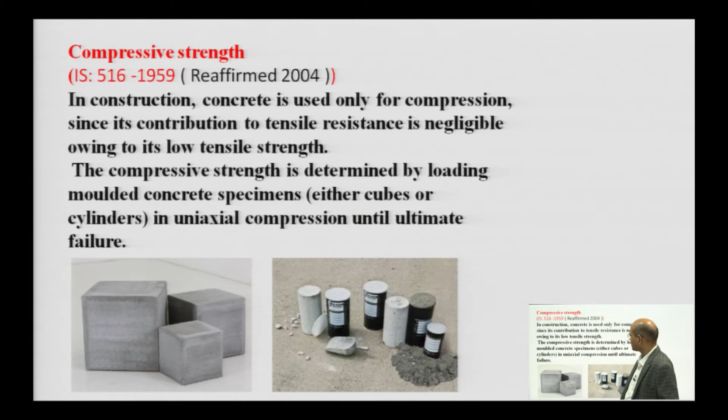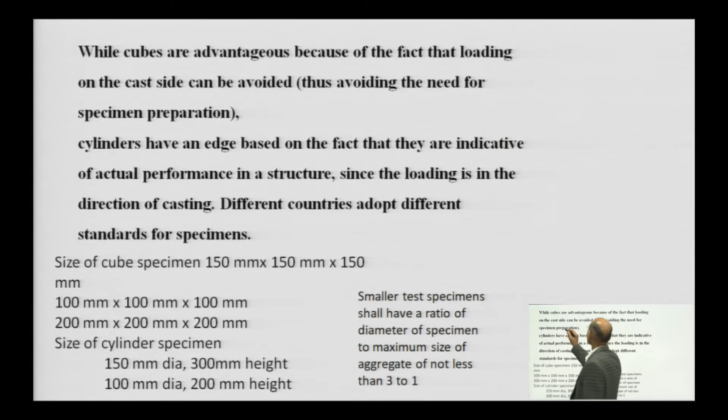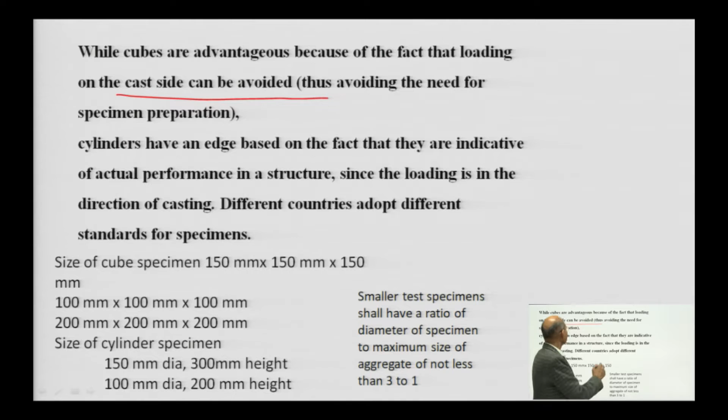Cubes are advantageous because loading on the cast side can be avoided. There are two issues: one is getting a plane surface, and the other is orientation of aggregate. Generally we have a procedure to test the cube. Suppose you have cast along this side, then we will test along this face or along the opposite face. That is the ease with which we can cast it and test it.

But suppose you want to test a cylinder. The cylinder will be cast on this edge, so you will not get a smooth surface. So capping is required, and capping involves a tedious procedure. That is why we have a customary of testing on cubes.

Some countries, like the USA, have a customary of testing on cylinders. These are the standard sizes of the cubes: 150 by 150 by 150 mm, and also 100 by 100 by 100 mm.

Suppose the maximum size of aggregate is not more than 20 mm, then we can test on 100 mm by 100 mm. Otherwise, we have to test on 150 by 150 by 150 mm size, which can handle up to 60 mm maximum size of coarse aggregate. But suppose you are using more than 60 mm, then we have to go for a larger size, like 200 by 200 by 200.

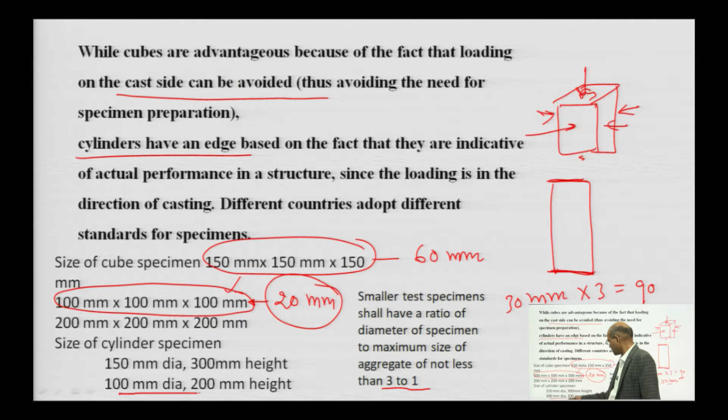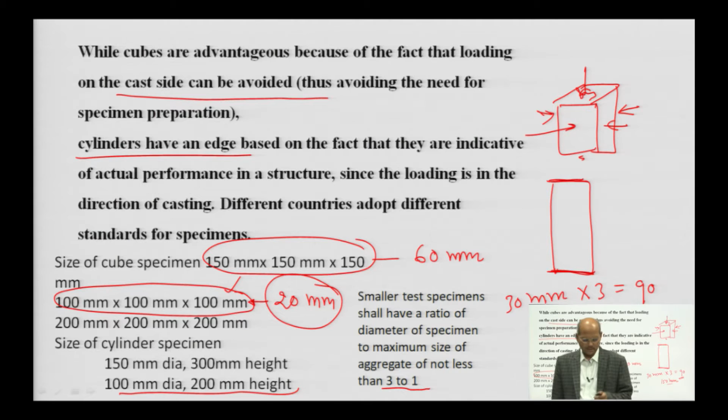About the cylinder, the standard size is 150 mm diameter and 300 mm height. If the maximum aggregate size is not more than 20 mm, you can use 100 mm diameter and 200 mm height. This is the standard size given in the IS code.

Now I will discuss the Platen effect. What is the Platen effect? Suppose we have a cube of size 150 by 150 by 150, and we are going to test it under a compression testing machine. Let us say we have a machine head here, I will take a different pen. Suppose this is our platen here.

This is made of steel, and modulus of elasticity of steel is approximately 2 into 10 to power 5 Newton per mm square. What is the modulus of elasticity of concrete?

Modulus of elasticity of concrete depends on the grade of concrete, and generally it is much lesser. Empirically, the modulus of elasticity is given by 5000 under root FCK, as given in the Indian Standard Code IS 456 2000.

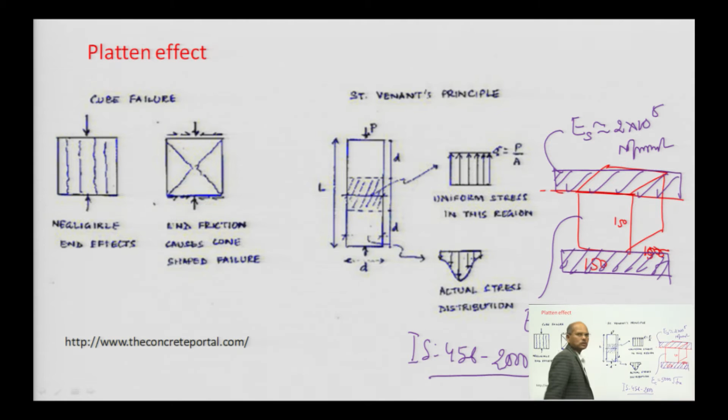Say we have a grade of concrete with characteristic compressive strength of 25. So it is 5000 under root 25, which becomes 2.5 into 10 to power 4. So almost you can say less than 10 times.

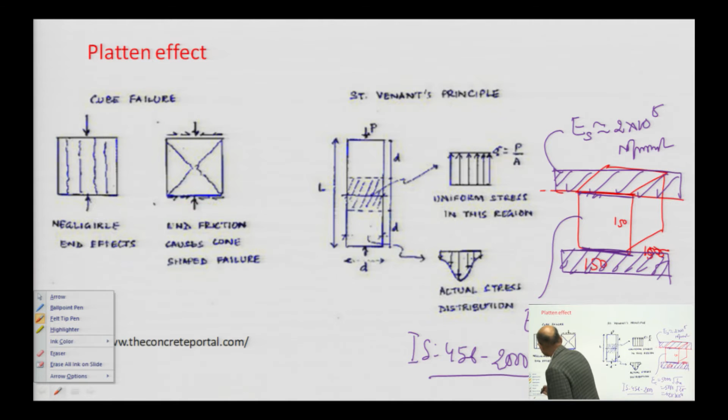So what will happen if there is friction between this surface and this surface? Due to this friction, there will be composite action.

Say this is the Young's modulus of concrete and this is the Young's modulus of steel. Concrete will try to expand, but due to the platen friction between the platen of the machine, this will not allow it to expand, so this portion will be under compressive action.

So what is going to happen? Whatever cube you have here, a standard cube, I will draw the 3-dimensional figure. This is under triaxial compression near the surface, and load is coming from the top. Due to the triaxial compression, this is having a confining effect.

Let us say we have some concrete here that is brittle in nature. Suppose we confine this concrete due to the frictional action. So this is going to take more load.

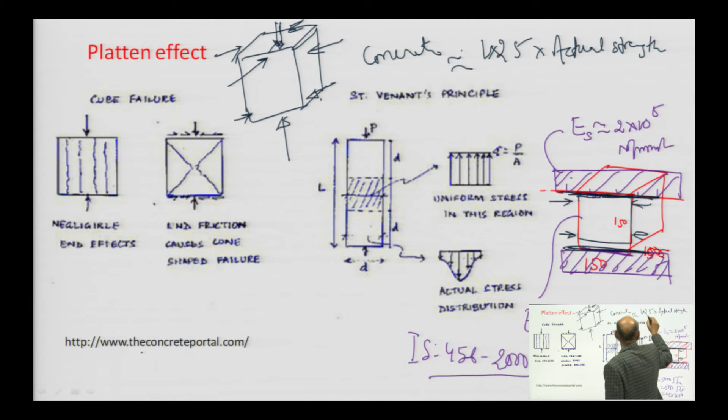Due to this platen effect, concrete is able to take at least about 1.2 times more load than its actual strength, about 1.25 times more than actual strength.

So if the platen effect is there, due to this we are getting a 45-degree angle here, and the result is we are getting more strength than the actual strength that is there.

In that case it is going to give you the actual strength, and the failure pattern will be different. In this case it will crack parallel like this, and in the other case, due to the platen effect, it is going to crack in this fashion because it is under confined condition.

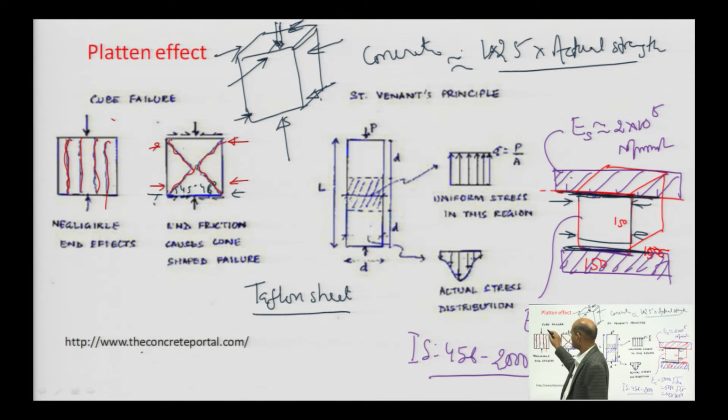So this is going to give you the actual strength of concrete. But due to ease in testing, we do this testing only, not the actual testing.

Suppose you want to test on a cylinder, generally if you want to get the compressive strength of concrete for research purposes where you want actual compressive strength. In that case, we increase the height. If diameter of the cylinder is d, height is taken at least 2 times d minimum, more is better.

So in this specimen it has been shown more. Here this is the diameter. So whatever central portion is there, that may be having actual direct compressive strength. Here you will get actual compressive strength, and you will get uniform stress throughout the central zone.

We have a uniform stress, uniform axial compressive stress we will get. We will get the actual compressive stress. So we know that according to Saint-Venant's principle.

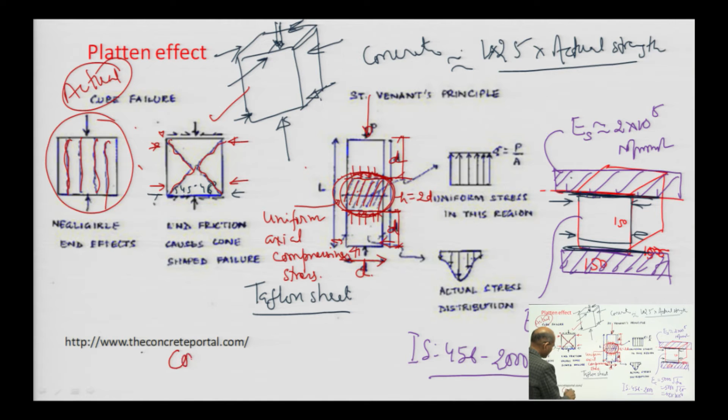So actual stress, suppose you want to get it for the cylinder. This is about the concrete cylinder strength, which is the actual one, and it is about the cube strength divided by approximately 1.25.

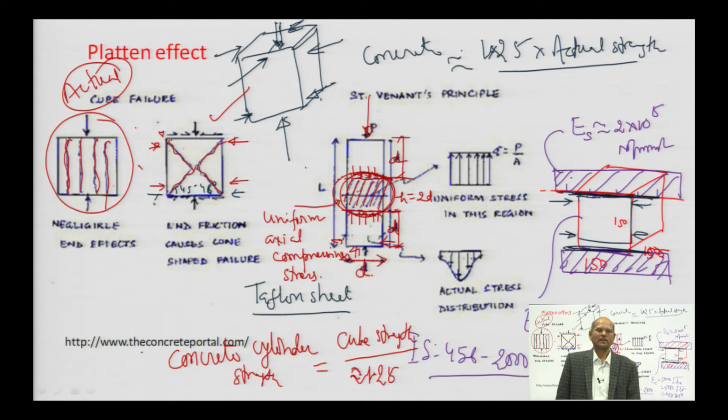You may not get exactly the same result because this material is not homogeneous in nature, it is not an isotropic material. So you will always have a variation of around 10 to 15%, depending on the type of concrete. Okay, so let us check some other thing.

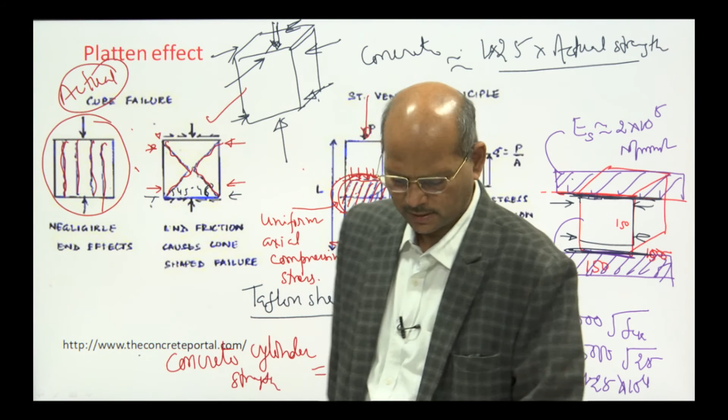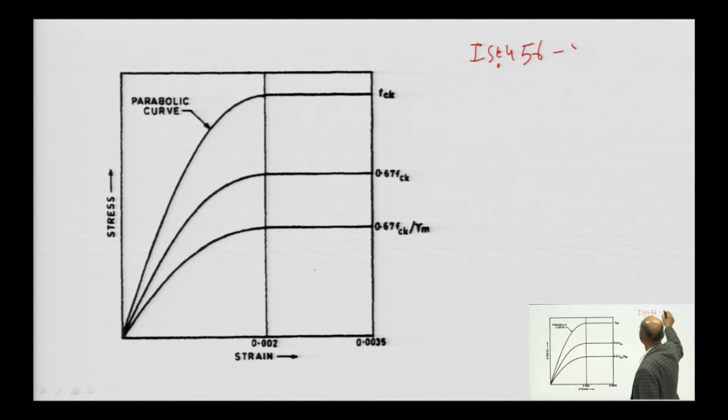I have taken this graph from IS 456, 2000. If you go to page number 69, you will get this graph. So from there I have directly taken this graph. So this is the stress strain curve for concrete.

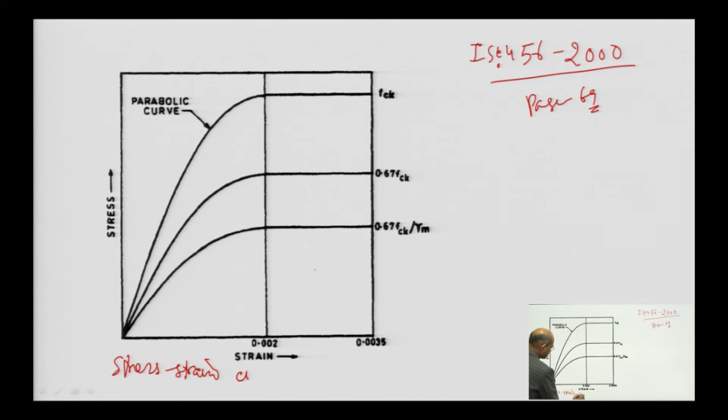So here we are getting a parabolic curve up to the strain of 0.002, and they have taken 0.0035. So this is the FCK, characteristic strength. So it is going to crack at this stress.

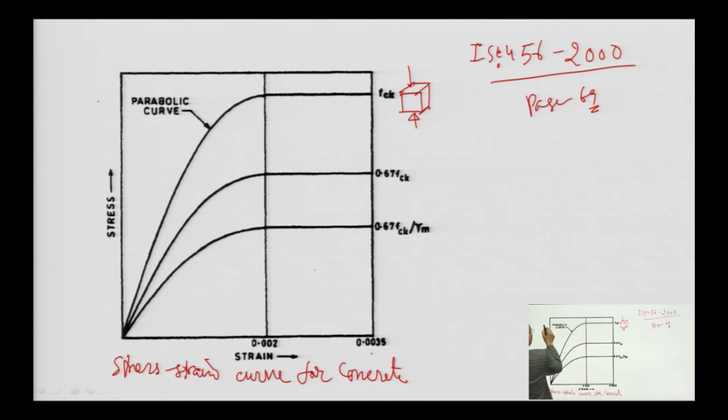So how to get the strength? You have a cube here of standard size, 150 by 150 by 150, and the surface area will be 150 by 150. So let us say this is going to crush at say load P. So compressive strength will be, what will be the compressive strength?

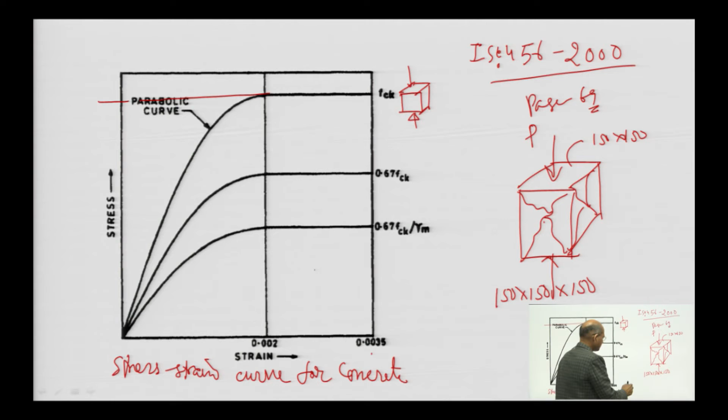Compressive strength will be given by crushing load divided by area of loading. So area of loading is 150 by 150, at P in Newton. So say we are getting a 28-day characteristic strength FCK.

So in design, what they have done, this is having the test on cube, but suppose you want to do the design in a member. So there they are designing in flexure 0.67 FCK. So what is there? They have multiplied this, say 33% approximately they have reduced the strength. So actual testing generally we can get around 25% higher result, but here they have taken 33%.

So for getting the actual result considering the platen effect, in design they have reduced by 33%, and the actual design we take 0.67 FCK. So in this one we apply the partial safety factor in limit state method of design, and in working stress method of design we divide by factor of safety. So that is nothing but the partial safety factor you apply, here gamma m, 0.67 FCK by gamma m.

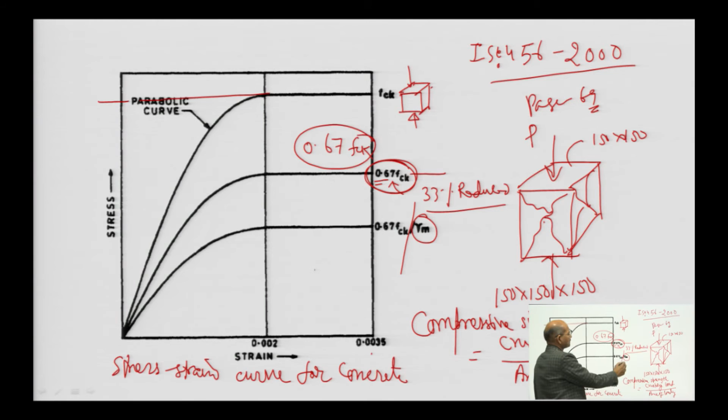So it depends on this. In limit state method generally it is taken as 1.5. So all these things will be learned in the next semester, not in this semester, when you go for the design of the concrete structure. So a comprehensive study will be done regarding this in that particular stage.

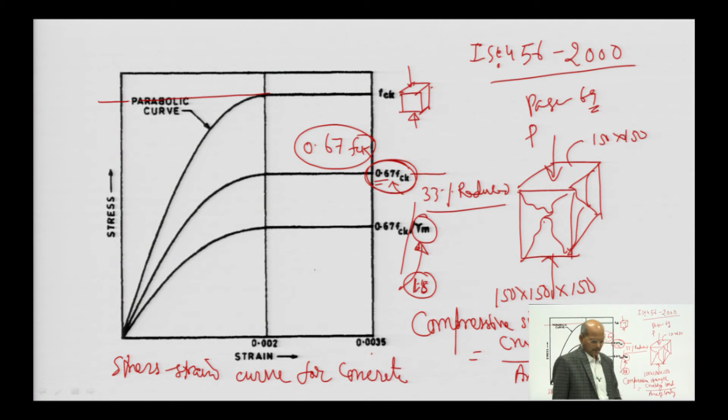So now I will discuss the test for flexural strength, the moulded flexure test specimen. So that is going to give you the tensile strength, we are going to get the tensile strength indirectly. So this is the indirect method of getting the tensile strength. Here we can observe this member is going to crack in bending tension. So there are two types of samples generally we use.

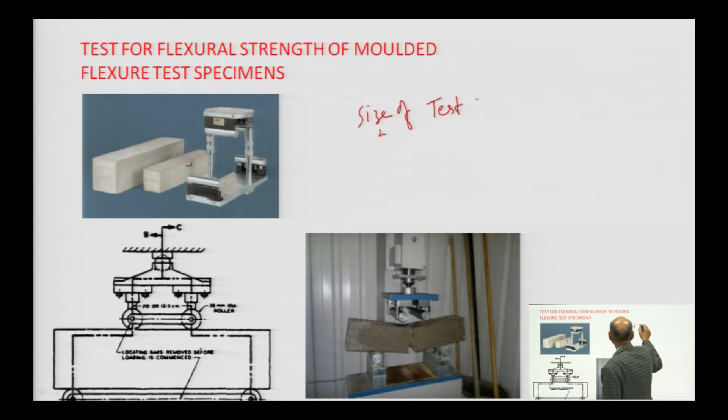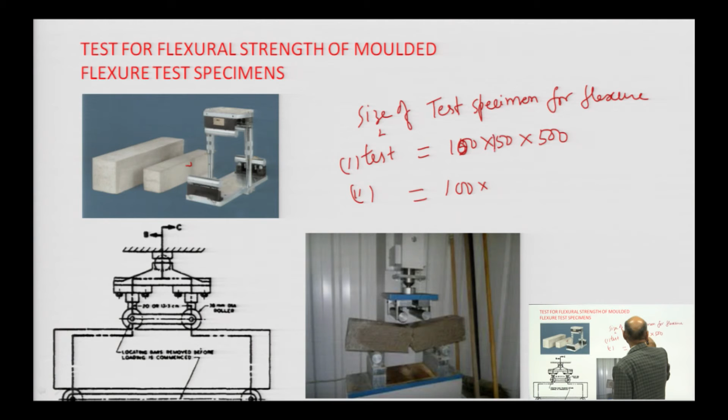So what is the size of test specimen for flexure test? It is 50 mm by 50 mm by... sorry not 50, it is 100 mm. We have to take 100 by 100 by 500, 5 times. Another sample is 150 by 150 is the cross section and 750 is the length.

So these two types of samples we can use for the testing. One is 100 mm by 100 mm by 500 mm, and another size is 150 mm by 150 mm cross section with length 750 mm, and that will be subjected to bending.

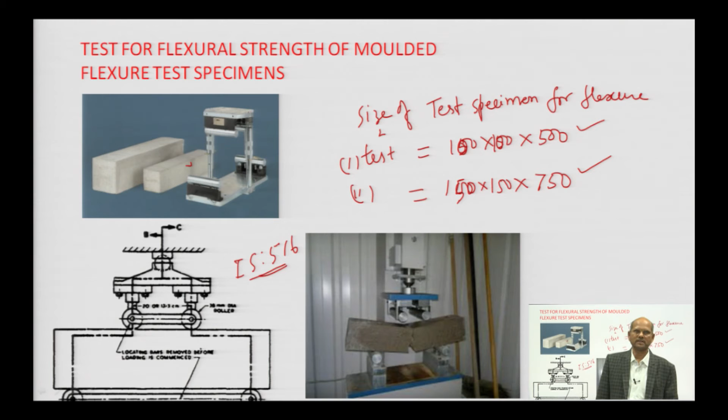So in bending, suppose we consider here this type of arrangement, this figure has been directly taken from IS 516. So if you go to IS 516, all this test method for the strength has been given in that particular code book. So you have to download all these codal provisions if you want details. Each and every procedure is given in detail here, including rate of loading, type of machine, specification for the mold. So everything is given here, and that we will get in details in all these code books.

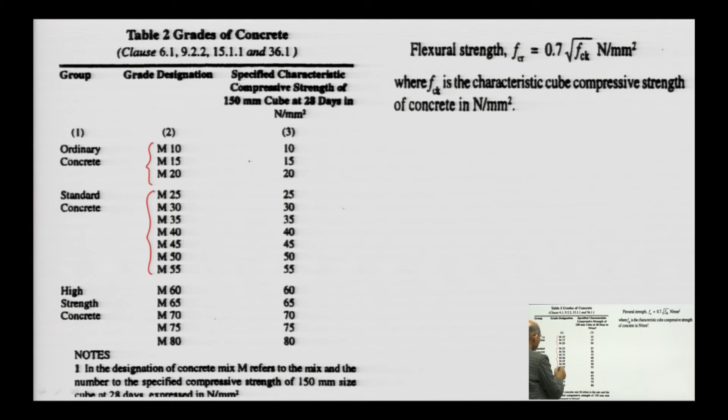So if you see table 2 of grade of concrete of IS 456, this concrete has been divided into 3 groups. One is ordinary concrete, then we have standard concrete, and high strength concrete. So we have divided types of concrete into 3 groups. So in this, M stands for mix, and this number, say I am taking this number 25.

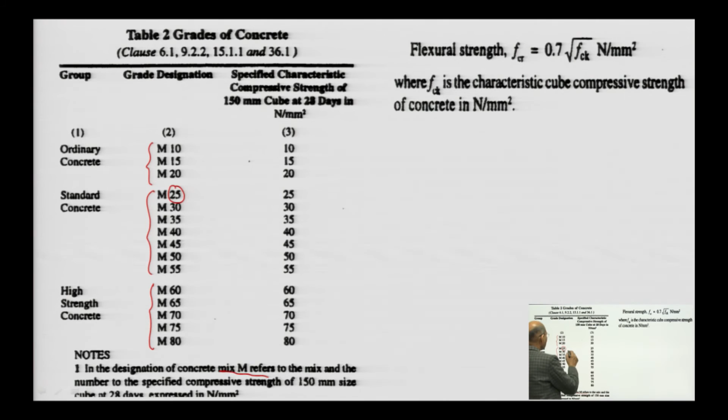So this 25 indicates characteristic strength. Details of characteristic strength will be discussed in unit number 4 when we go for the design of concrete mix. So briefly I will tell you, characteristic strength will be established after testing at least 30 samples, and one sample consists of 3 specimens. So around 100 samples, suppose you are testing 100 cubes, then you can establish what is the characteristic strength of a particular grade of concrete.

So let us say we have this one, M25. So this is the compressive strength. What is this? Compressive strength.

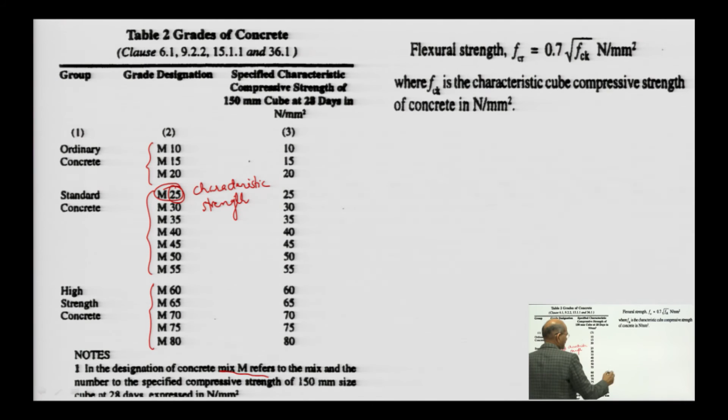So at the age of 28 days we have to test this. In 28 days, one day you have to keep in air curing in the mold and 27 days in the water tank.

This gives the characteristic strength values: 10, 15, 20, 25, 50 and up to 80. This is the old code, IS 456 2000, but if you see the amendment taken in 2013, this has been changed. It has gone up to M55, M60 - M60 is the standard concrete - and then they have increased this to M85, M90, M95 and M100. So they have changed this criteria.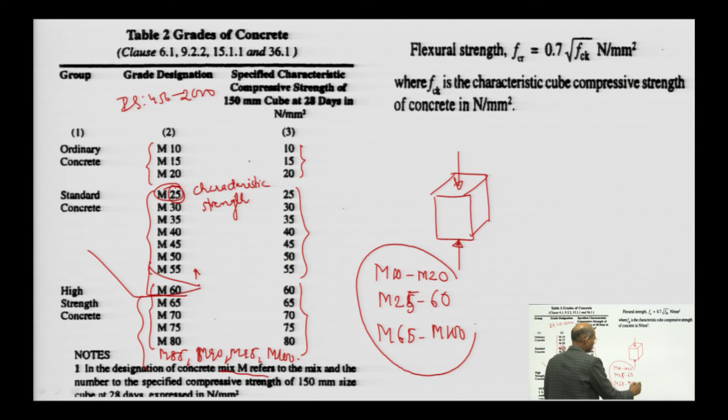So what is the value? M10 to M20 is ordinary concrete, M25 to M60 is standard concrete, and M65 to M100 is high strength concrete. So we have divided concrete into 3 groups: first is M10 to M20, standard concrete is M25 to M60, and high strength concrete is M65 to M100.

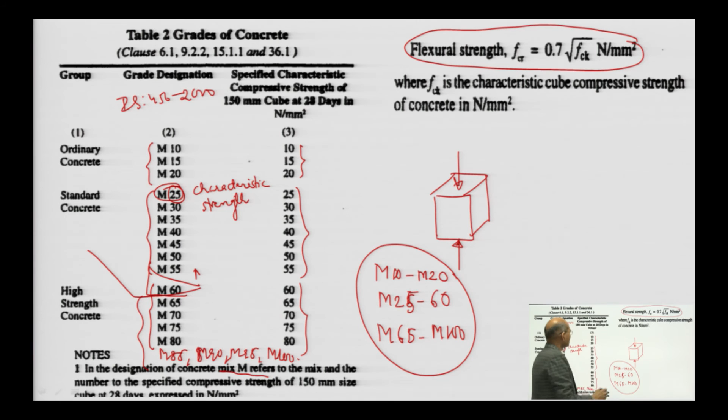Suppose you want to find out flexural strength. Based on different tests, they have derived an empirical formula. Suppose you have a characteristic strength, say M25 grade, what will be the approximate flexural strength? You can find it easily as 0.7 under root 25, since 25 is the characteristic strength. This gives you the indirect tensile strength, which is 0.7 times, so this is nothing but 3.5 Newton per mm square. But actual strength we can get only by testing.

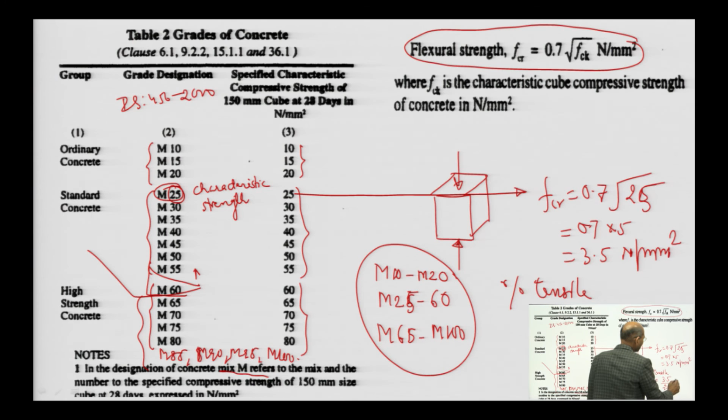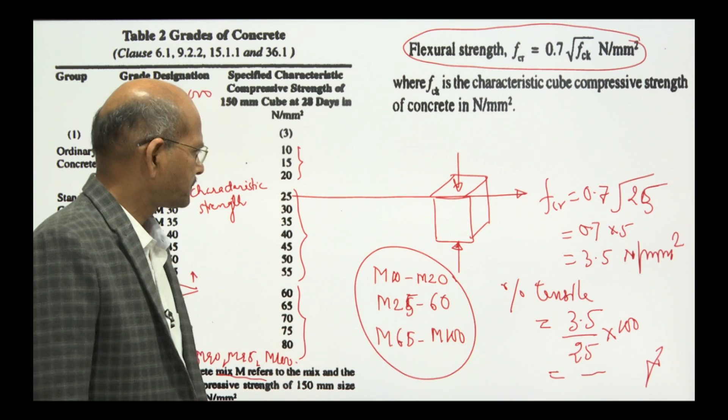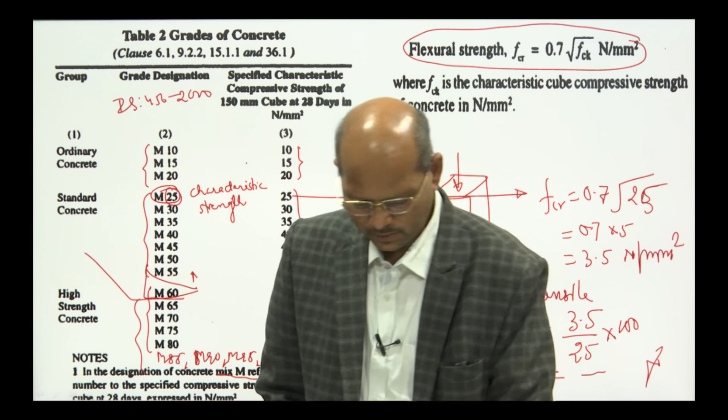If you see the relation between tensile strength, you can find the percentage of tensile strength. In this case, just take 3.5 divided by 25 multiplied by 100. You will get approximately, depending on the grade of concrete, values ranging between 8 to 20%. If higher is the grade of concrete like M100, you can get a tensile strength of around 7 Newton per mm square.

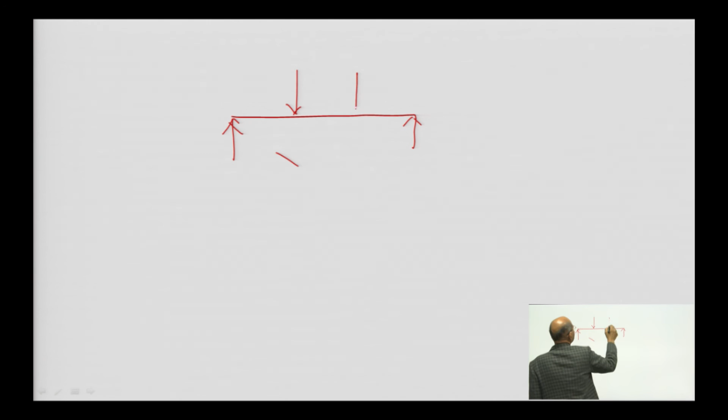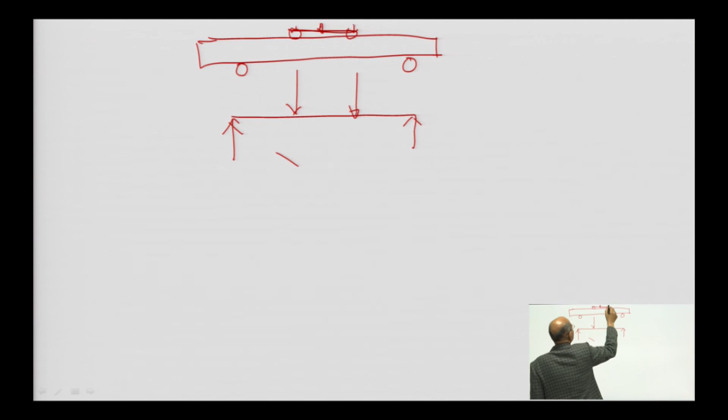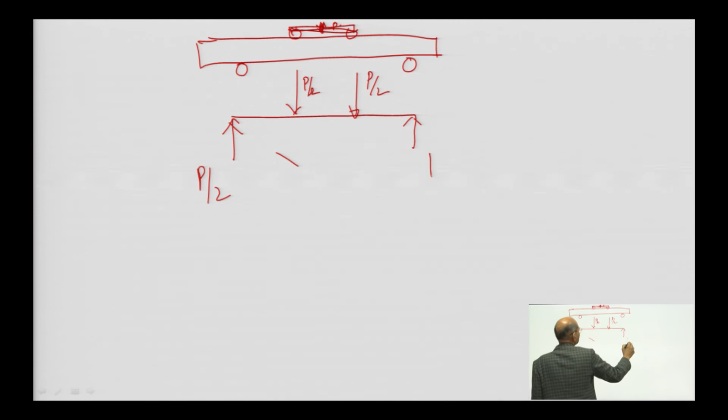So this is the indirect method of doing the test. Now how to do the testing - if you want to do this 2-point testing, generally we do the test in this fashion. This was our test sample, kept here, then we put certain loading arrangement like this. The load you put here, say this load is P, so this becomes P by 2, and this becomes P by 2. Say this distance is A and this span is L.

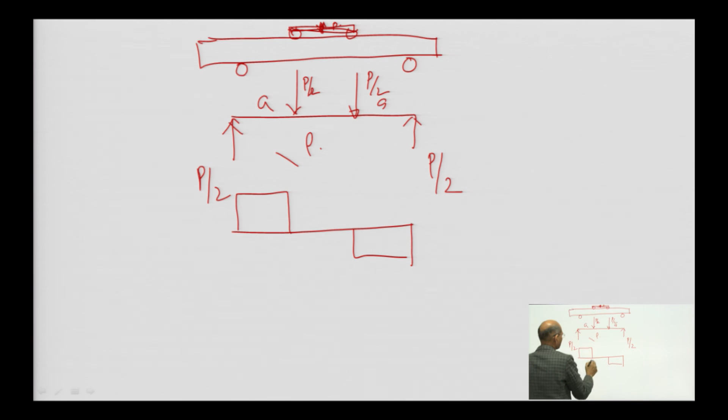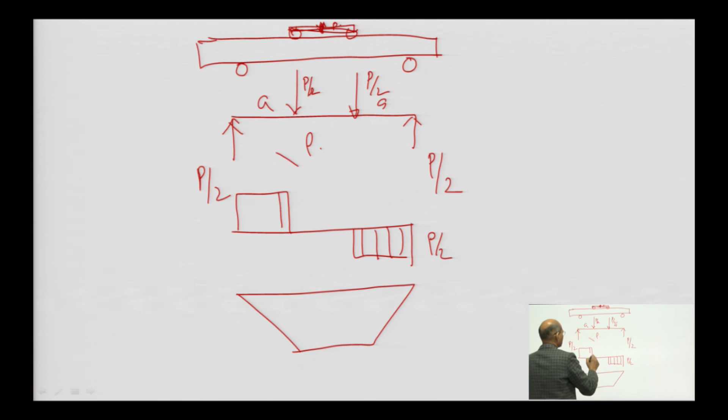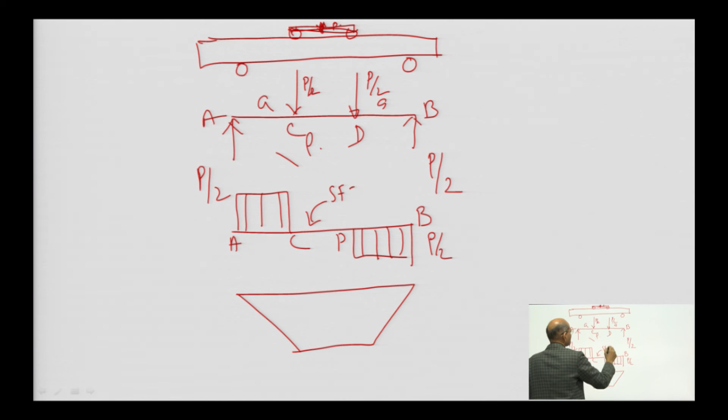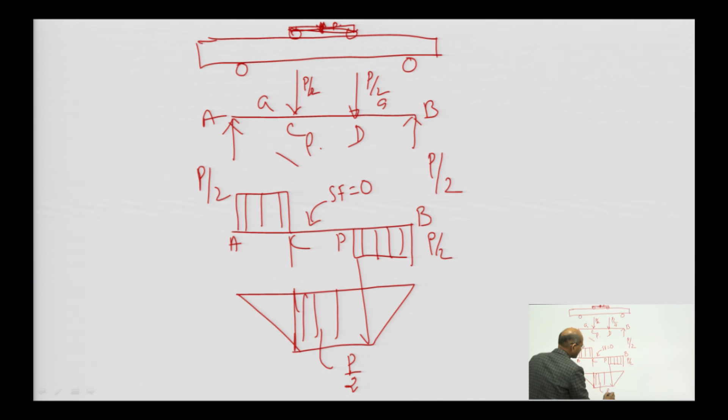If you draw the shear force diagram, it will look like this. If you want to draw the bending moment diagram, it becomes like this - this value will be P by 2. Say this is A, B, C, D. So this portion CD has shear force of 0. What about this part? This has maximum bending moment, which is nothing but P by 2 into A.

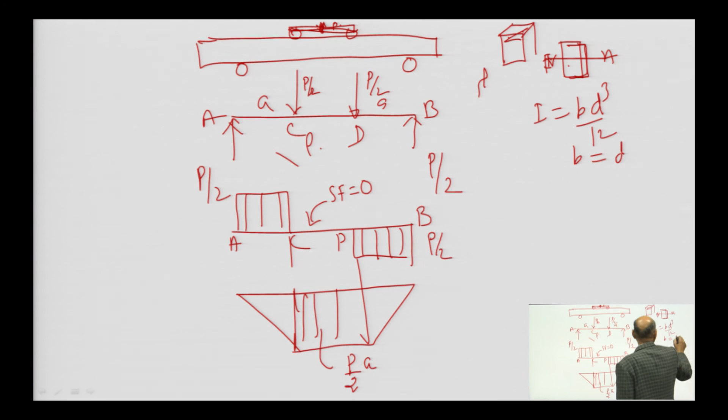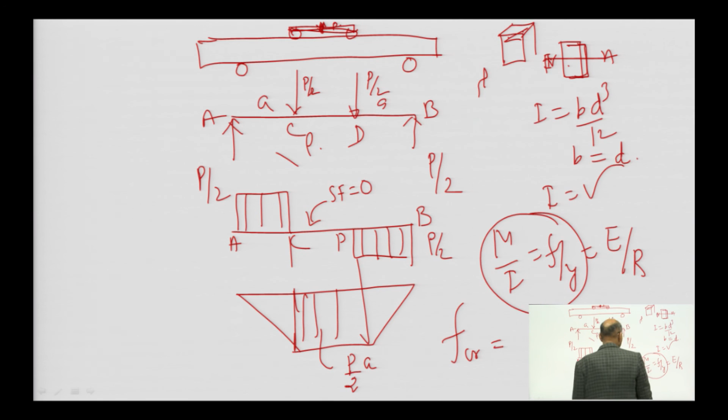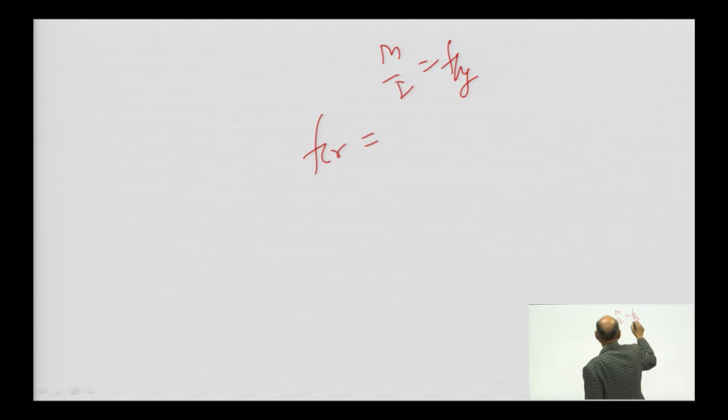Say this is the cross section of the beam. What is the moment of inertia? Suppose I want to find the moment of inertia about the neutral axis - this is given by BD cubed by 12, here B is equal to D. So you can calculate the moment of inertia from here, and we know M by I equals F by Y equals E by R. Consider this part, we will be in a condition of finding the flexural cracking strength of this beam, FCR. You can calculate FCR with this formula: take M by I equal to F by Y, so this is nothing but M into Y by I. This gives you the flexural strength of concrete.

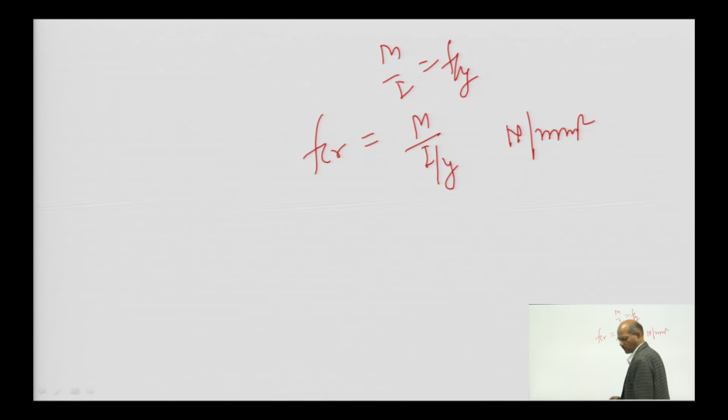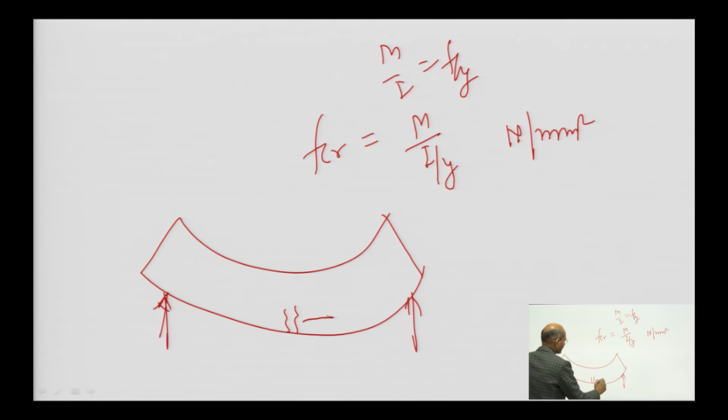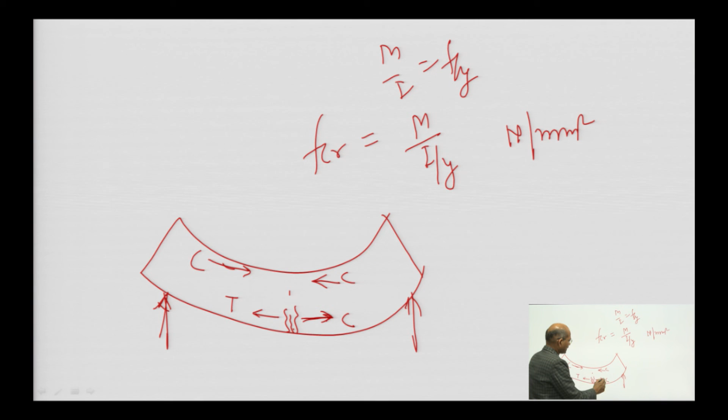So if you see this beam flex in this fashion, what happens? This part will be under tension, under tensile force, and this part will be under compression. As this goes on cracking, once one crack develops, it will crack with very high speed, almost the speed of sound, and crack immediately. The neutral axis keeps shifting, and finally this sample gets cracked. This gives you the indirect tensile strength.

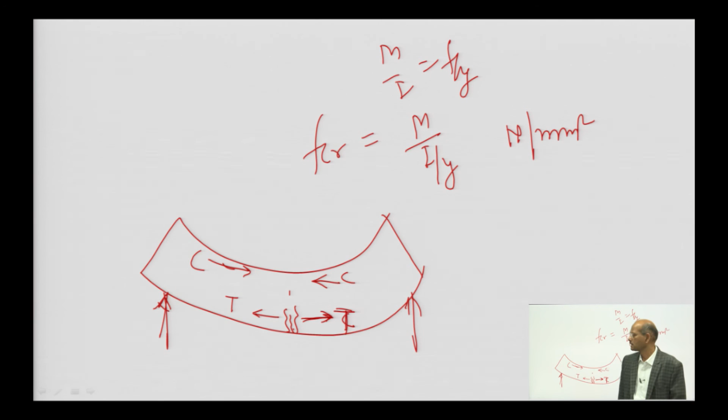This is very important. So today we have learned compressive strength - it is tested under standard conditions, with rate of loading taken as 140 kg per centimeter square per minute. This is how we have understood it. Thank you.